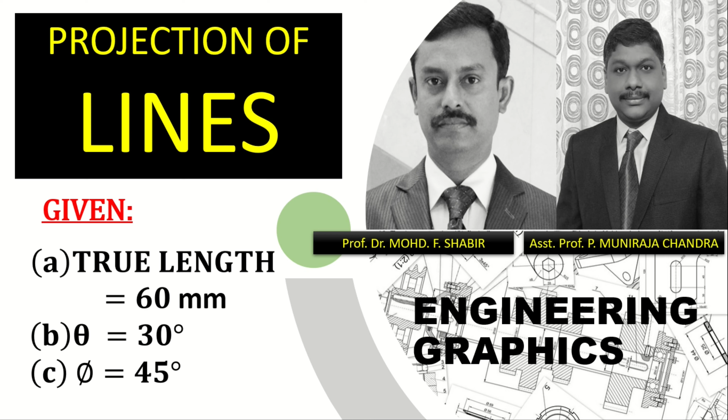The question given is a straight line AB 60 mm long has its end A 20 mm above HP and 30 mm in front of VP. The line is inclined at 30 degrees to HP and 45 degrees to VP.

Draw its projections. It is given the line is inclined at 30 degrees to HP and 45 degrees to VP. So, the position of the given straight line is that it is inclined to both the planes HP and VP.

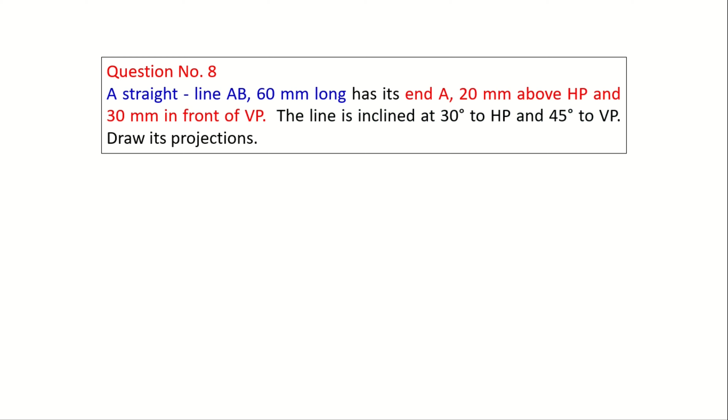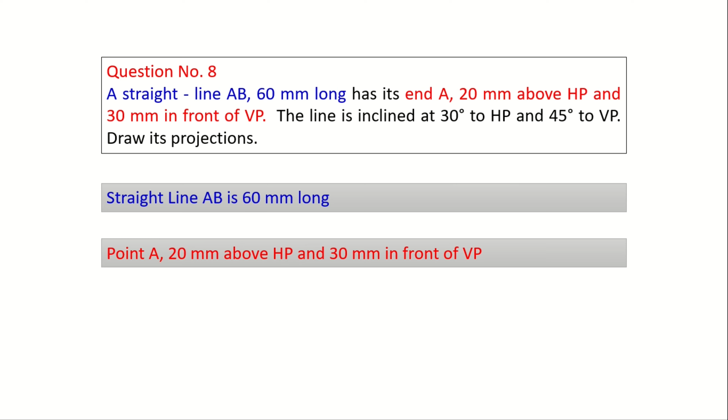Also, it is given the true length of the straight line AB is 60 mm long and the end point A is 20 mm above HP and 30 mm in front of VP. Let us now start to draw the projection of the given straight line.

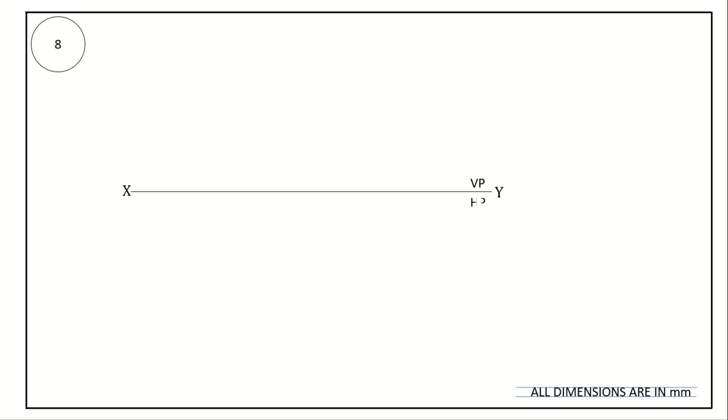First, draw reference line XY. The area above XY is VP, the area below XY is HP. It is given point A is 20 mm above HP.

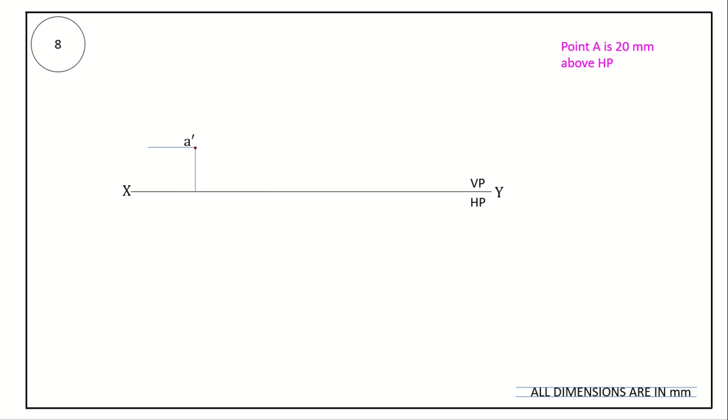So, the front view of the point A, that is A dash, is 20 mm above XY. From the reference line measure 20 mm, mark a point A dash. This point A dash is 20 mm above XY.

Also, it is given point A is 30 mm in front of VP. So, the top view of the point A is 30 mm below XY. From the reference line measure 30 mm, mark the point A. This point A is 30 mm below XY.

Here both the points A dash and A both are lying in the same projector.

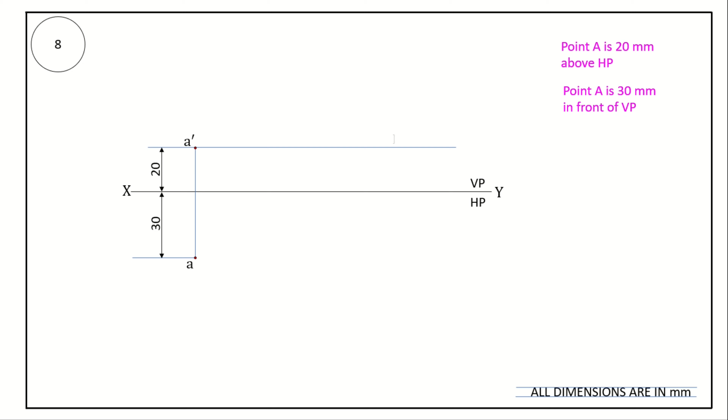Now from the point A dash, draw a parallel line to XY. This line is locus of A dash. Similarly, from the point A, draw a parallel line to XY. This line is locus of A.

It is given true inclination of line to HP, theta equal to 30 degrees. Take a protractor with reference point as A dash, measure angle equal to 30 degrees and draw an inclined line.

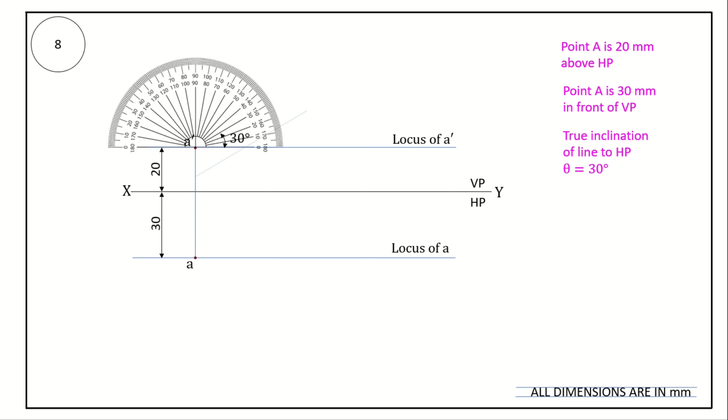It is given true length of line AB equal to 60 mm. From the point A dash, measure 60 mm, mark the point B1 dash. Here A dash B1 dash length measures 60 mm and the line A dash B1 dash is inclined at an angle of 30 degrees to XY.

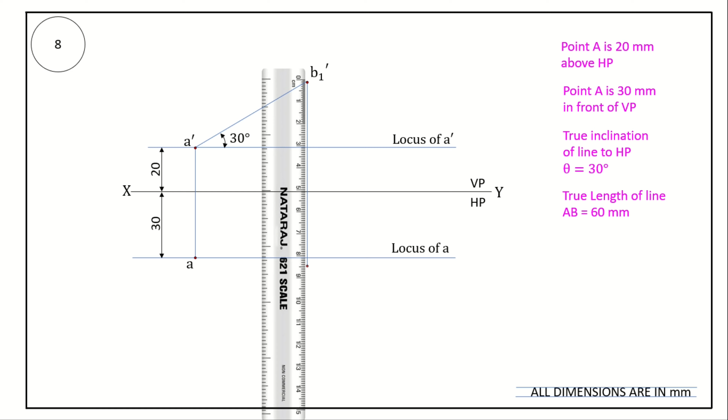From the point B1 dash, draw a perpendicular line to XY. This line cuts the locus of A at a point B1. Now measure the length between A B1. This length is the top view of the line equal to 52 mm.

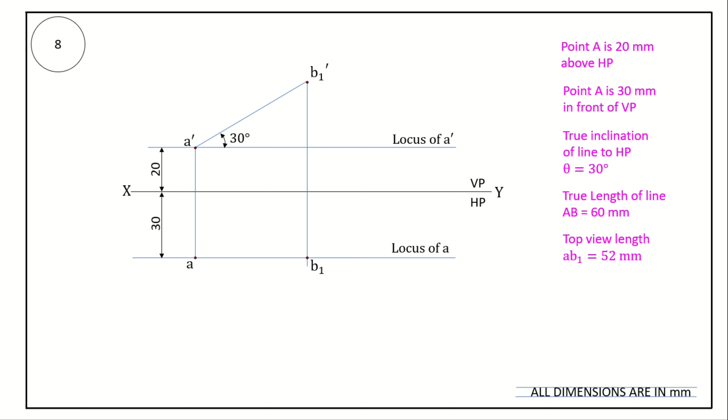So, using the true angle to HP, that is theta equal to 30 degrees, and true length of line AB equal to 60 mm, we have found the top view length, that is AB1 equal to 52 mm.

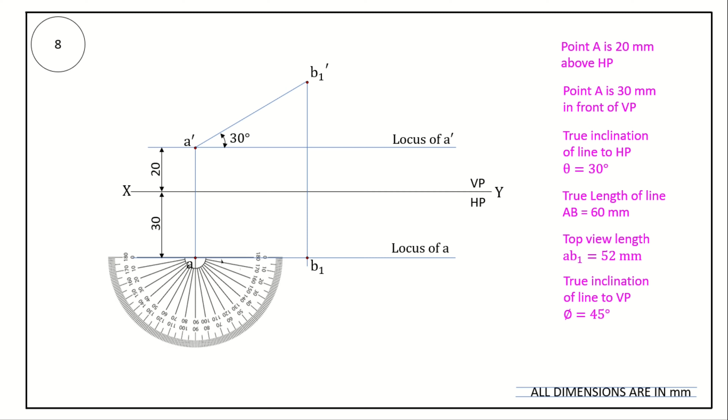Now it is given true inclination of line to VP, phi equal to 45 degrees. Again take a protractor with reference point as A. Measure angle equal to 45 degrees, draw an inclined line.

We know the true length of line AB is 60 mm. From the point A, measure 60 mm, mark the point B2. Here the length of the line AB2 is 60 mm and this line AB2 is inclined at an angle of 45 degrees to XY.

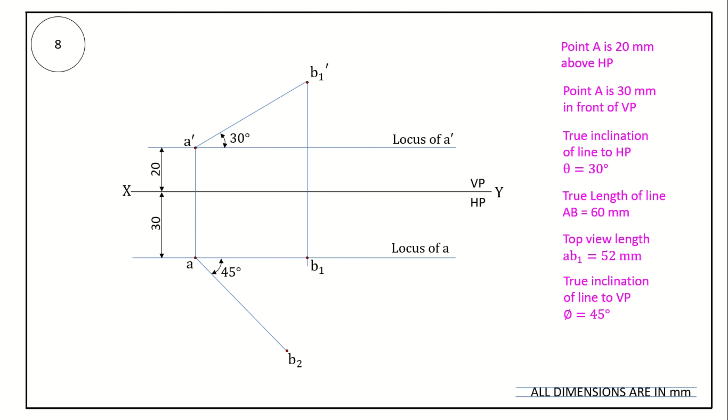From the point B2, draw a perpendicular line to XY. This line cuts locus of A dash at a point B2 dash. Measure the length between A dash B2 dash. This length is front view length, that is A dash B2 dash length is equal to 42.5 mm. It is the front view length of the line.

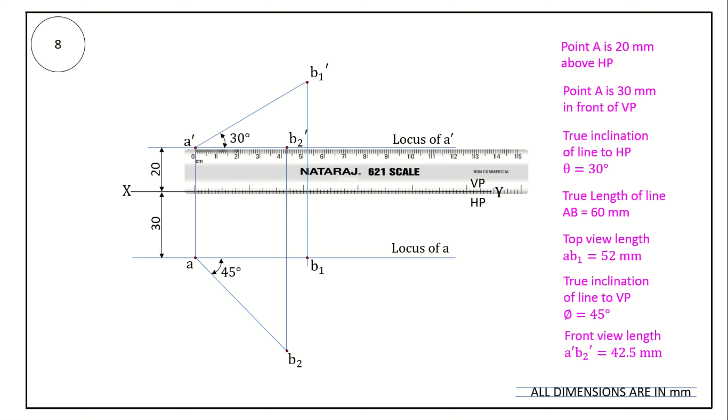So here in total, using the true inclination of the line to HP and true length, we have found the top view length, and also using the true inclination of line to VP and true length of the line, we have found the front view length. It is equal to 42.5 mm.

Now from the point B1 dash, draw a line parallel to XY. This line is locus of B dash. Similarly, from the point B2, draw a line parallel to XY. This line is locus of B.

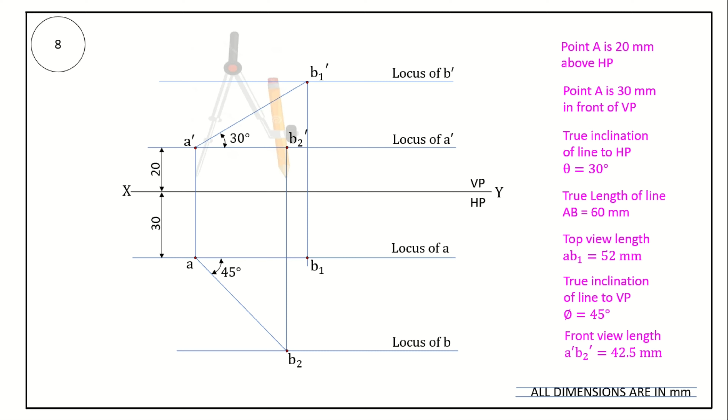Now let us locate the point B dash and B, that is front view and top view of the point B, using rotating line method. Take a compass, measure radius equal to A dash B2 dash length. It is equal to 42.5 mm.

Draw an arc. This arc cuts the locus of B dash at a point B dash. Join A dash B dash. This line is the front view of the given line AB.

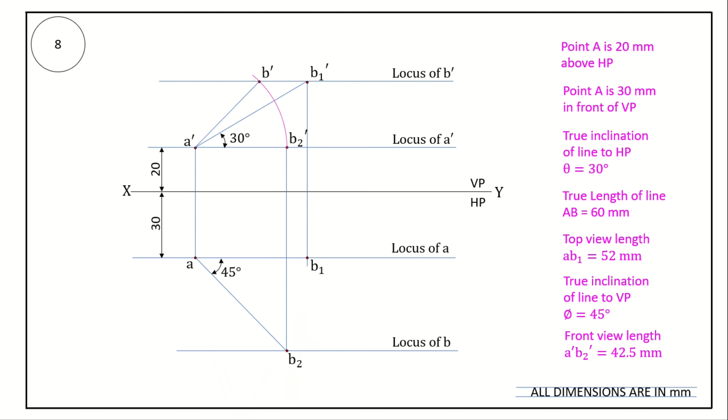Again, take a compass, measure length AB1 equal to 52 mm. Center point as A, draw an arc. This arc cuts the locus of B at a point B.

Join A and B. This line is the top view of the line AB. Now check whether both the points B dash and B, that is the front view and top view of point B, lie in the same projector. If it is correct, then darken the answer. A dash B dash is the front view, AB is the top view.

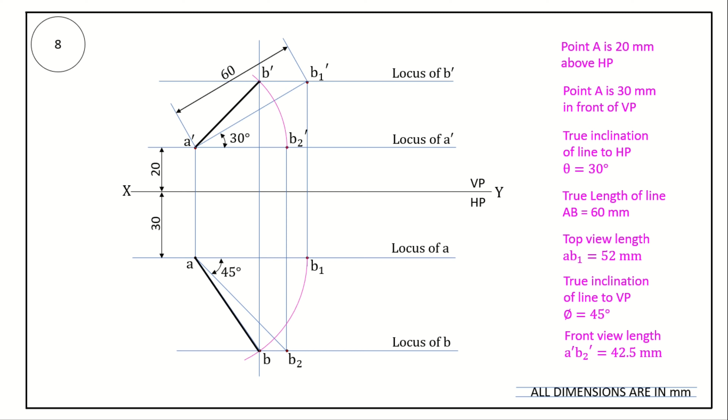Here A dash B dash line and AB line is the projection of the given line AB. Show the dimensions. The true length of the line is equal to 60 mm. So this is the answer for the given question.

Now to have a generalized idea on projection of straight lines inclined to both HP and VP, we must know what data were given in the question and the data we have found to complete the projection of straight lines. The following part will make it possible to draw any question from projection of straight lines inclined to both the planes.

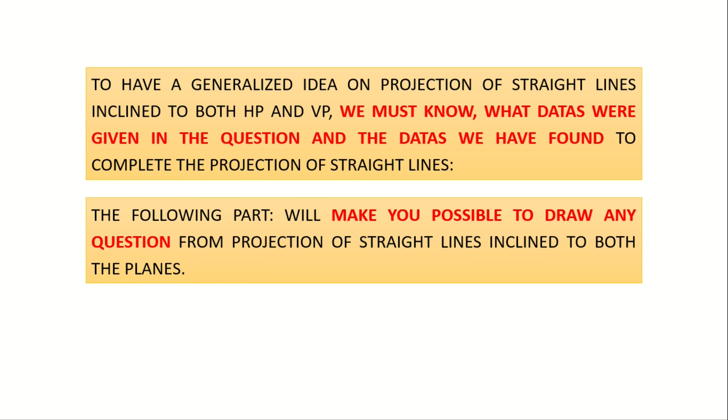Now, while drawing the projection of a line, there are totally 12 data. The first one was point A is above HP, it is given, it is 20 mm. The second data is point A is in front of VP, it is equal to 30 mm. So the location of the end point A is given in the question, it is 20 mm above HP and 30 mm in front of VP.

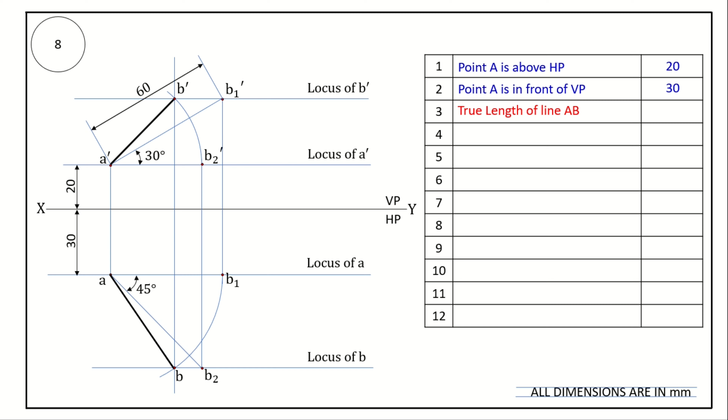The true length of line was given equal to 60 mm. The true inclination of line to HP was given, theta equal to 30 degrees. True inclination of line to VP, phi equal to 45 degrees. So in the question they have given the end point location and three data: true length, theta and phi. So using this 5 data, while completing the problem, we have found the remaining 7 data.

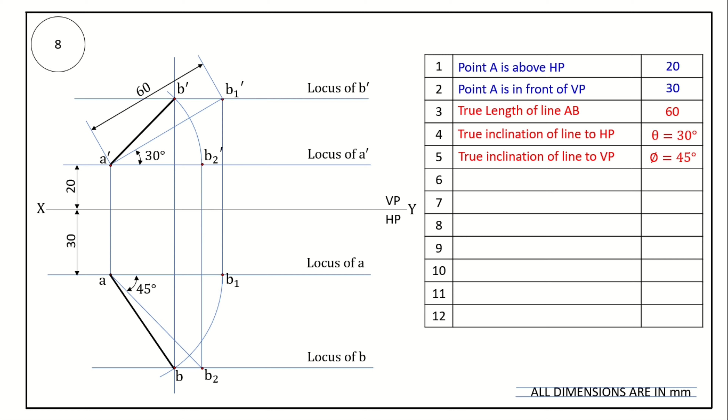Let us now see what data we have found while drawing the projection of the straight line. Top view length AB1 equal to AB. If you measure, this length is equal to 52 mm. AB1 equal to 52 mm and length of AB equal to 52 mm. So the top view length is equal to 52 mm.

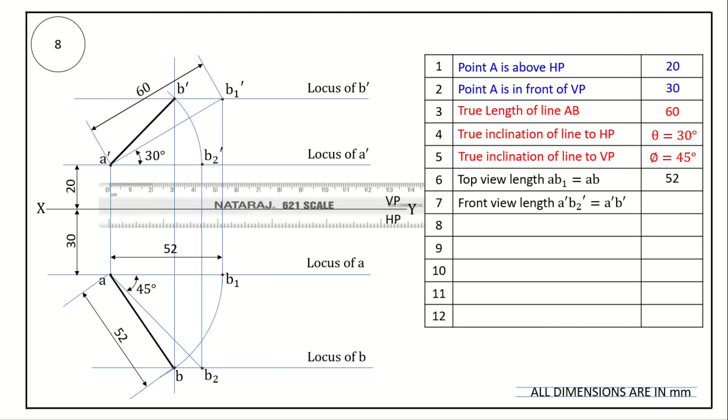Front view length A dash B2 dash equal to A dash B dash. If you measure the distance of A dash and B2 dash, it is equal to 42.5 mm, equal to A dash B dash equal to 42.5 mm. So the front view length is equal to 42.5 mm.

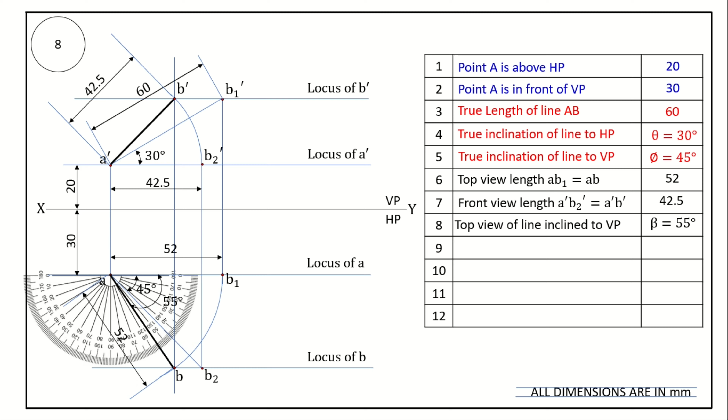Top view of line inclined to VP. If you measure the angle of the top view line, it is equal to 55 degrees, that is beta equal to 55 degrees. Front view of line inclined to HP. If you measure the angle of the front view line, it is equal to 45 degrees. So alpha equal to 45 degrees.

Point B is above HP. So measure now the distance between reference line XY and locus of B dash. This length is equal to 50 mm. So point B is above HP by 50 mm.

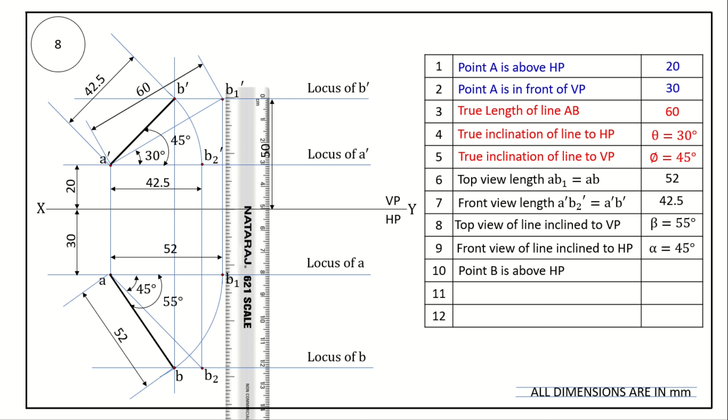Point B is in front of VP. If we measure the distance between XY and locus of B, it is measured, the length is equal to 72 mm. So the point B is in front of VP by 72 mm.

Distance between the projectors, that is you have A dash A projector, B dash B projector. If you measure the distance between these two projectors, it is equal to 30 mm. So distance between projectors is 30. So totally we have 12 data.

In the question they may give you any 5 data. The solution is the same, only the steps will change. The procedure is same, the method is same, only the steps will change. If they have given me the top view length, front view length and point B above HP, I must draw such that I get the same answer. The drawing will not change, but the steps will change. So kindly remember, if any data is given, only the steps will change, but the answer will not change.